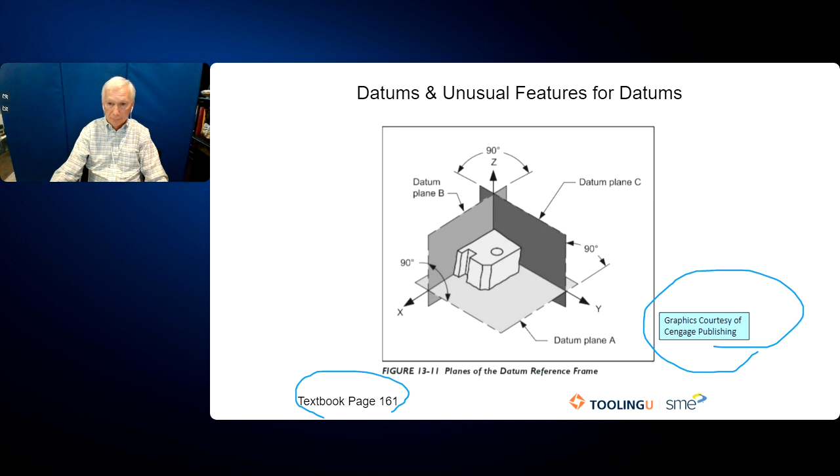This is just a quick reminder of what we should know and where we need to go. We're going to be using datums and unusual features for datums in the following slides. This is here because some of the things that have changed in the ASME standard from 2009 to 2018 involve the definition of how to deal with unstable datum surfaces.

Here are the ways we deal with it. So we have a part that rocks, and we have two choices. We can use an algorithm if we're using a CMM, or we can use shim stock to balance out the rockiness, so that if we're on a granite table using an open setup or standard measuring equipment, which I'll abbreviate SME - that's standard measuring equipment, nothing to do with tooling U-SME.

If we're on a granite table and going to use a dial indicator, we need to use shim stock to keep this thing from rocking. What we do is we balance it - we do not push it all one way or all the other way. We balance it, shim it, and go from there.

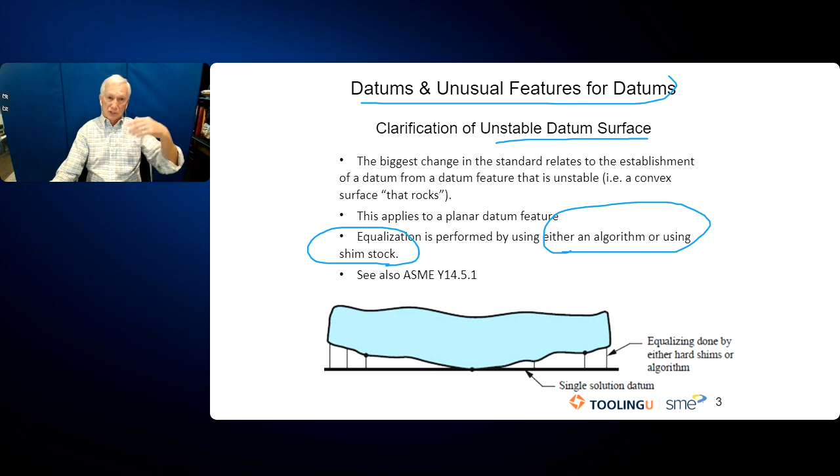Now if it's using a CMM, use the algorithm built into the CMM for parts that are rocking. It will look at your part, and however you balance it, you've got to hold it where it is on the granite table under the CMM, and the CMM will take that rockiness and out-of-flatness into consideration in an algorithm. So just a point of something new and different, because in previous versions we were supposed to rock the part all one way, and now we balance.

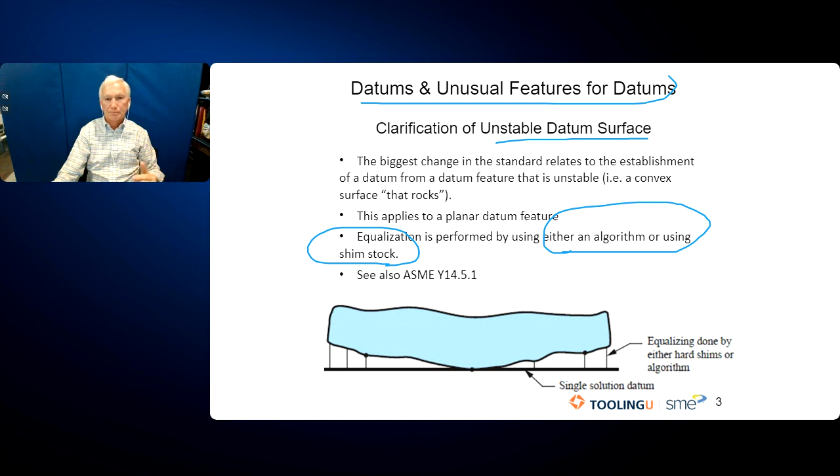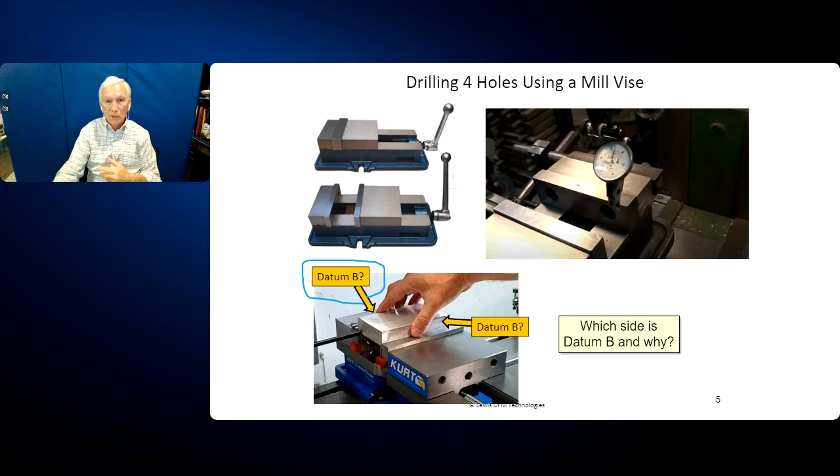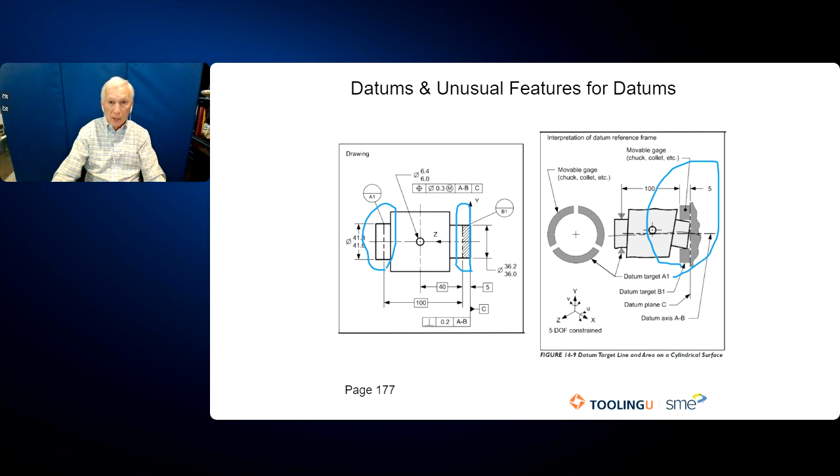That takes you then to the view on the right, and you see that we're going to grab datum A area with a chuck of sorts or a collet, and we're going to make sure that we grab only the area identified with the crosshatch on the left - we will only grab the area that is datum A, which is a circle with something that's a collet. A collet is a tapered kind of thing that grabs a diameter, and it makes line contact.

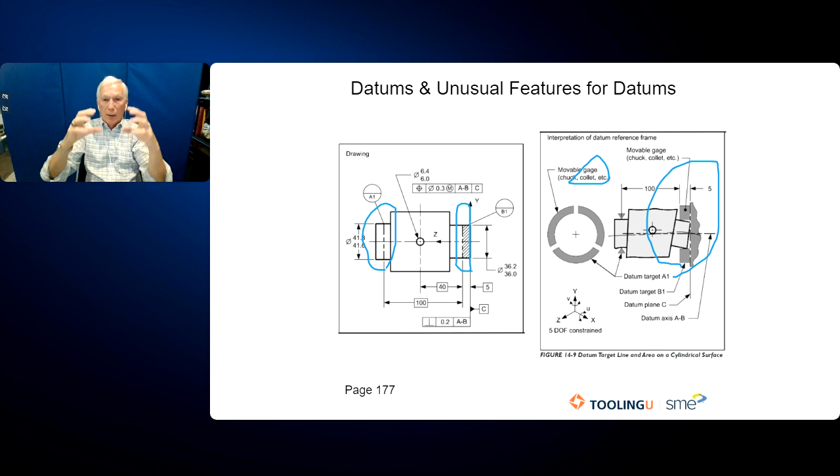It does not make area contact. So on the right, the chuck will make area contact. On the left, the collet will make line contact. And these two are both simultaneously grabbing the part, and that is what creates datum A dash B.

These are some weird things to do and some weird ways to do it, and that's why it's in this lesson. And here's another one.

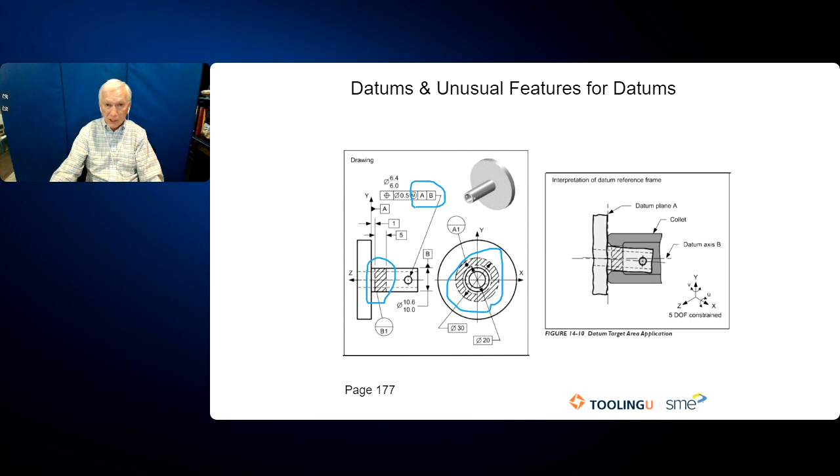We have this part on the left, with datum A on the face of the part and datum B on the OD of that boss that sticks out. According to the feature control frame used on that part, datum A is primary, meaning we make 3-point contact on datum A. Notice that face, datum A, makes 3-point contact on the collet, where the diameter is not making 3-point contact - it's only making like 1-point contact. So understand datum A being primary is 3 points, datum B secondary is 1 or maybe 2 points.

But if we reverse these, we would say B was primary, and then we would grab on all of datum B in the crosshatched area and make 1-point contact on the face of datum A. So understand these datums can be on the same part and they can be conflicting. We could even have holes in this part, some located primary to datum B and secondary to A, and other holes primary to A and secondary to B. It's really the part geometry and the way it functions.

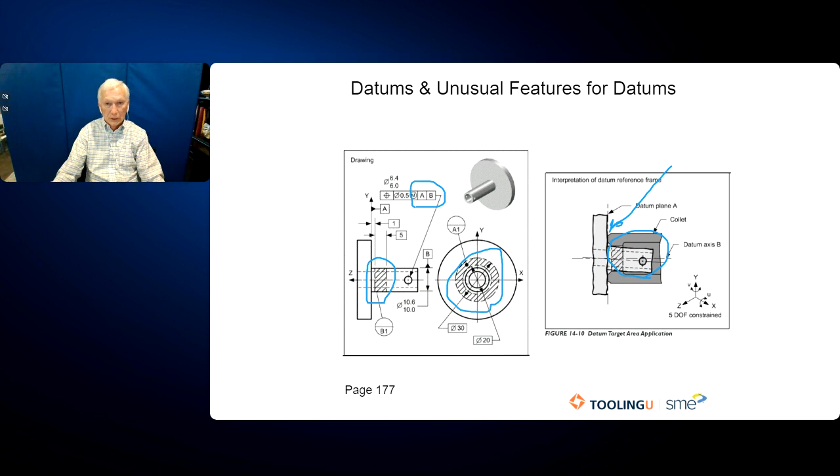Here's some other weird stuff with datums. Notice we have datum A established with 3-point contact. They're on 2 different levels, and that's the weird part. Here they are again - we got 1, 2, and 3. Can we do this? And if we do, how do you call it out?

Well, you see how we got these A's here? You can do these things. Or you can even make datum A off the part a certain basic distance to all 3 points. So this is a weird application. It's on page 177 of the book.

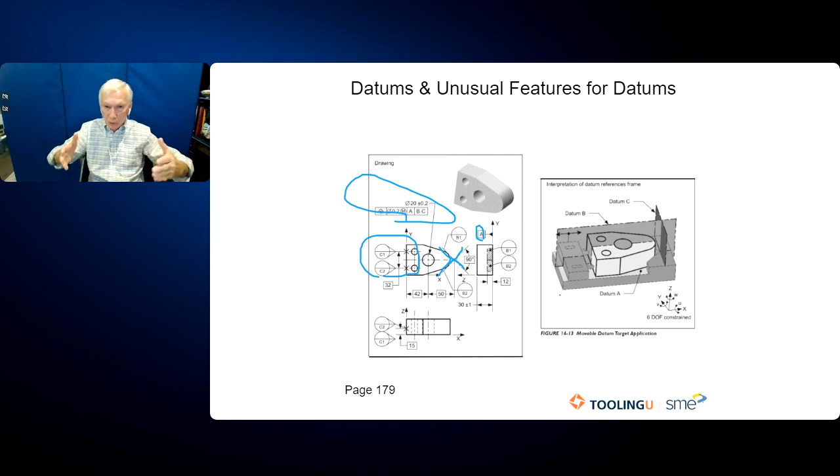It's obtained, if you look on the right in the graphic, after we contact points C1 and C2, we use those points to push the part into the next nested inspection fixture that picks up the contact at B1 and B2. It's probably not going to be line contact - it's probably going to be point contact.

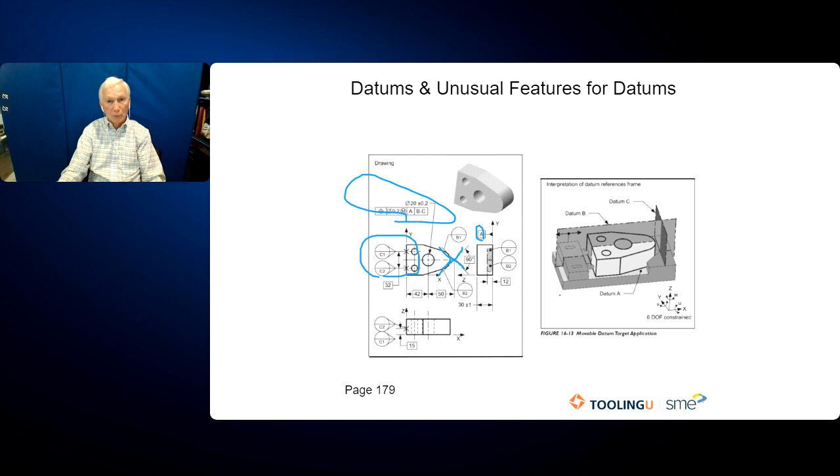So we're moving on. We're done with datums for the most part. Rule 1 is size controls form. But other things we need to talk about are what else does it control? Rule 1: size controls and contains form. I'll show you more what contains means.

Versus what we don't want to do, and that is we don't want to use Rule 1. Rule 1 says by default, anytime you have something of size, you automatically control and contain the form of that size. Versus if I have size but I don't want to control or contain form, then I can use the independency concept. The independency concept - I've got some examples coming up.

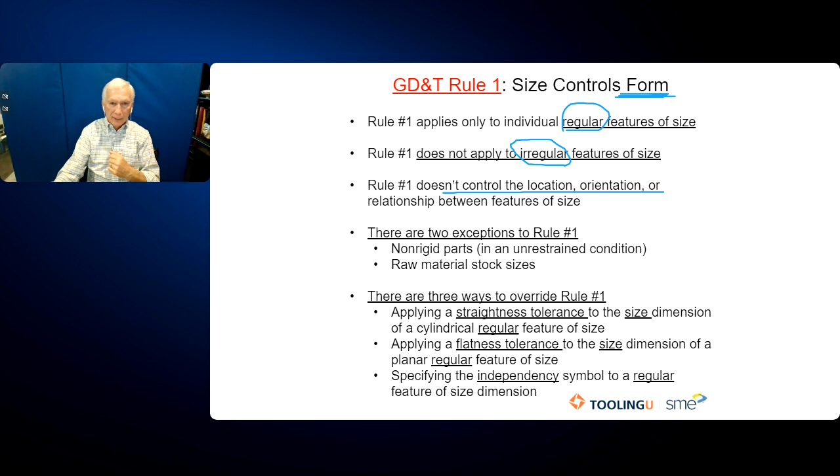Okay, there are two exceptions to Rule 1: if the parts are made out of something like rubber, because they're too flimsy. And if we're buying raw material from a supplier and we want to make sure the material is real straight - well, the straightness of that raw material is controlled not with GD&T, it's controlled by the standards and requirements of the supplier of the raw material.

They will provide material that's straight, round, and whatever it's required to be in their material delivery requirements. We don't use GD&T for that, and because of that, Rule 1 does not apply to bar stock.

There are 3 ways to override Rule 1, and we're not going to go through the first 2 -- that might be something for the advanced, next 10 things. Anytime we use straightness tolerance applied to a regular feature of size, Rule 1 doesn't apply. It also doesn't apply to flatness tolerance applied to a feature of size. If you took the last GD&T webinar, this stuff is in that chart I gave everybody and made sure you all got a chance to see. Go look at it there.

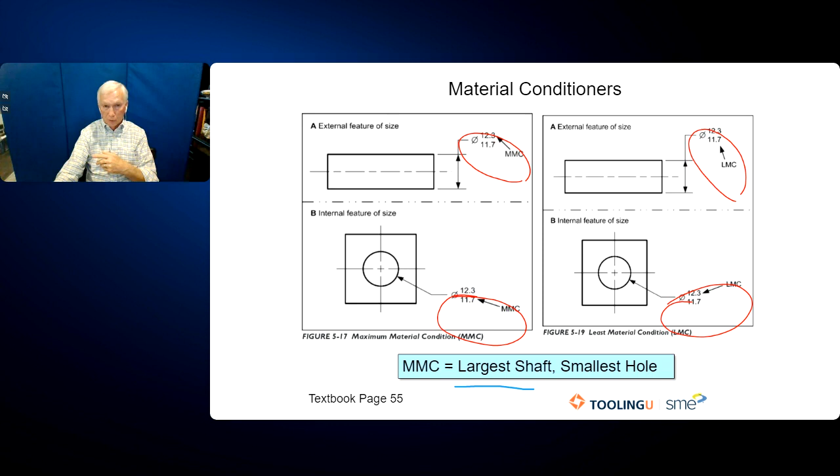In the upper left corner of this figure, we have a round part, and its MMC is the largest shaft. The MMC is 12.3, it is not 11.7. The largest shaft, the smallest hole. So we look at the hole in the lower left, and we see that the MMC is 11.7. So the MMC of the shaft is 12.3, the MMC of the hole is 11.7. We have to remember that, because I'm going to keep talking about it like you do know it.

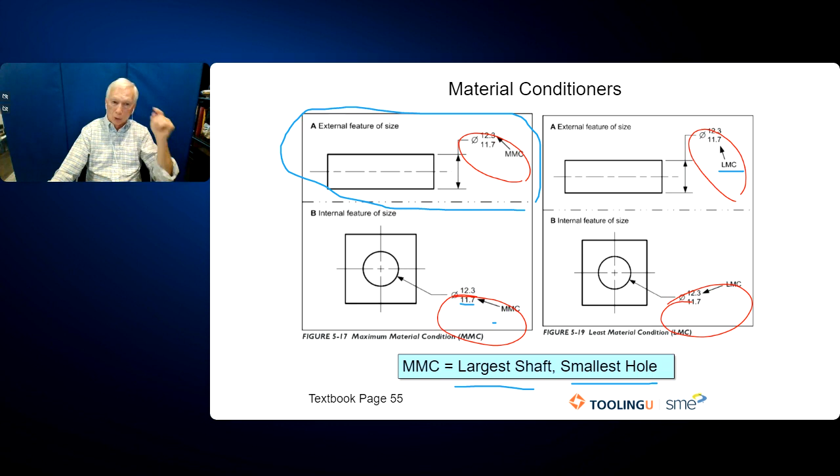Now the figure on the right is LMC, the opposite of maximum material condition. I'm not going to talk much about LMC because it just gets confused with largest shaft, smallest hole. Just remember, MMC: largest shaft, smallest hole. When I'm doing this training in real life, a 3-day training, I repeat that about a dozen times and people still get it wrong. So you will get this wrong if you don't remember -- largest shaft, smallest hole.

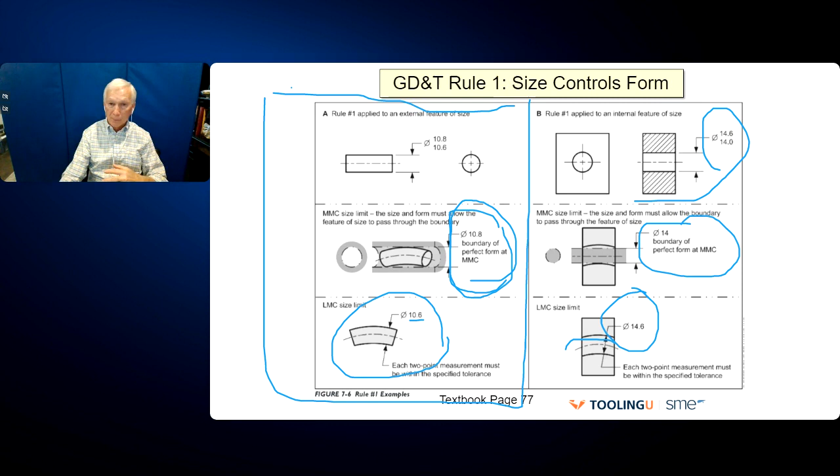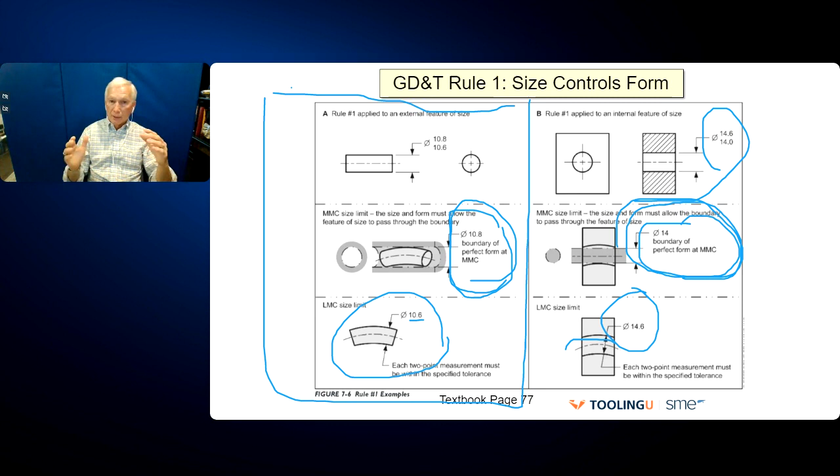So you've got to remember, this is an assumption -- it's Rule 1, you always have to know it, you always have to apply it. And that's why it's so important. So now that you know this, we're going to say what Rule 1 does not control. And I already told you, it doesn't control any of this stuff. It only controls form.

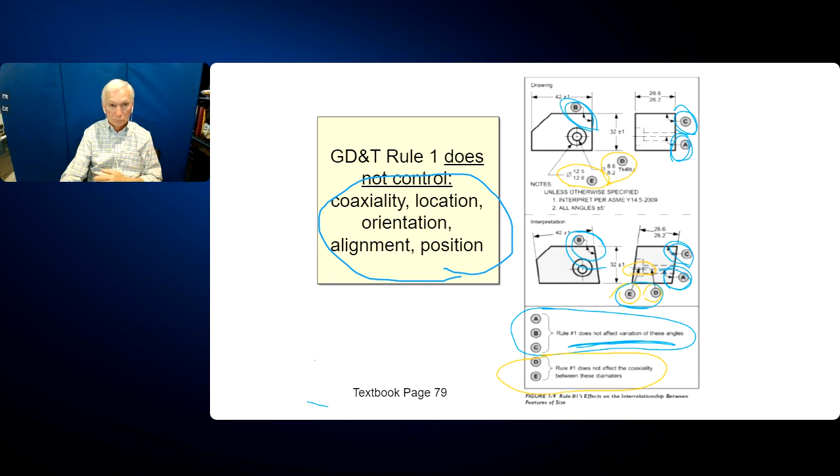But understand, if you use the independency symbol and you say it no longer has to comply with rule one, now it can be out of round any amount or out of straightness any amount, unless you add a straightness or roundness tolerance to that surface and that diameter.

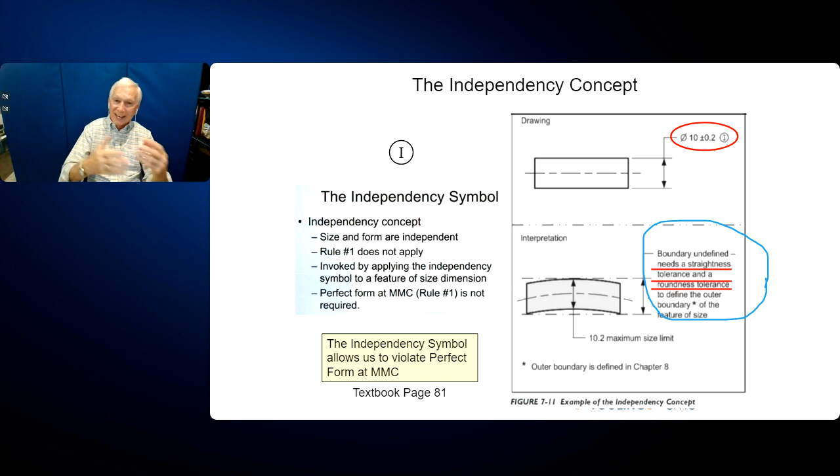And if you do, it should be more than the 0.2 millimeter—probably 0.3, 0.4, 0.5. That would say that the most important thing on that pin is the size, not the straightness nor the roundness. So I'm giving more relaxation to the roundness and straightness by using the independency concept.

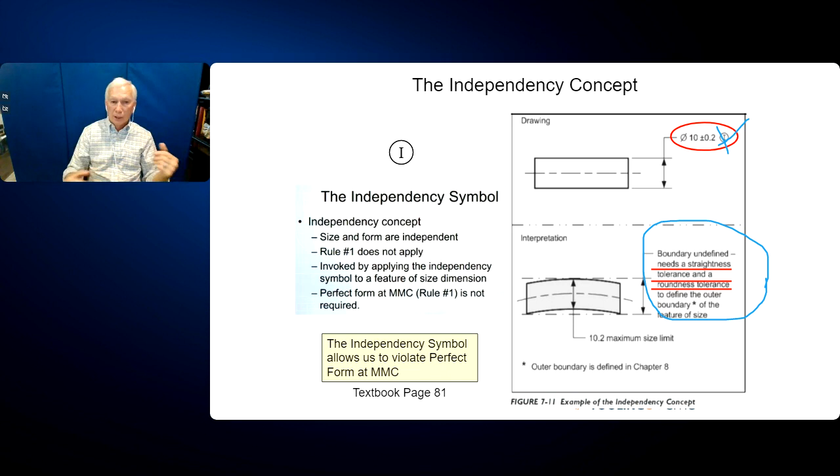But if that roundness and straightness of 0.2 millimeters is good, I would take the eye out. And rule one says now, perfect form at MMC, the 0.2 is controlling straightness and roundness as I deviate away from MMC. So that's why we had to talk about this, so we could understand the independency concept.

Okay, so we're going to keep going. Regular and irregular features of size. They look like this. These are regular features of size.

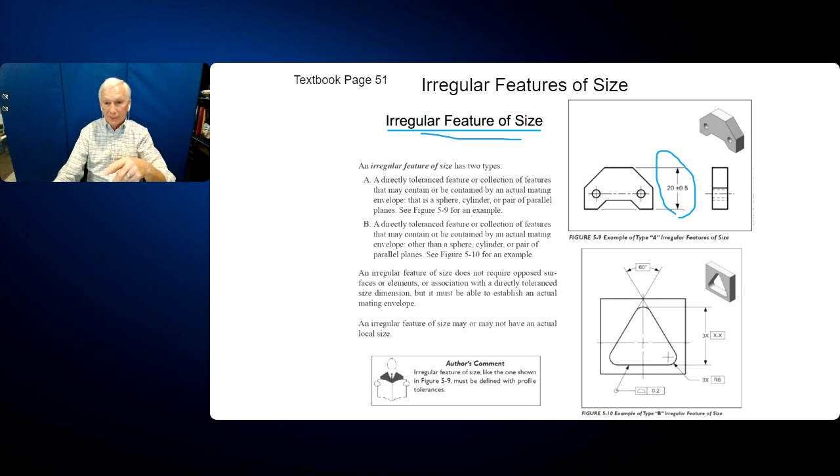Regular features of size are opposed or partially opposed—that means everything on here is opposed, and you can measure it with a micrometer, that kind of stuff. This, you cannot. You've got the 20 millimeter dimension, and there's no way to use a pair of micrometers to measure that. So this is an irregular feature of size, and an irregular feature of size does not require us to abide by Rule 1. So Rule 1 doesn't apply to irregular features of size, but it does apply to regular features of size.

Now you know. Okay, we already talked about that.

Pitch diameter rule. What we show here is a drawing on the bottom—it's a partial drawing with some threads. The reason for this is to tell you that if you call out threads and you don't use major or minor diameter, the default is that you'll automatically be required to measure the location of those threads to the pitch cylinder, or pitch diameter.

And it's not just for threads—it's for gears, splines, anything with a pitch cylinder or pitch diameter, including threads. So this is called the pitch diameter rule.

Now, why is this important? Because 99% of the people out there putting threads on drawings don't know they have the option to add major or minor diameter to the call out. I do, and I put it on my call out.

Notice in the red box, it says major diameter. Now, because I'm making this part all in one setup on the lathe, I'm cutting the major diameter and all of the other diameters, including the datum diameter, which is B—you can't see it because it's kind of off the page. I'm cutting them all in the same setup.

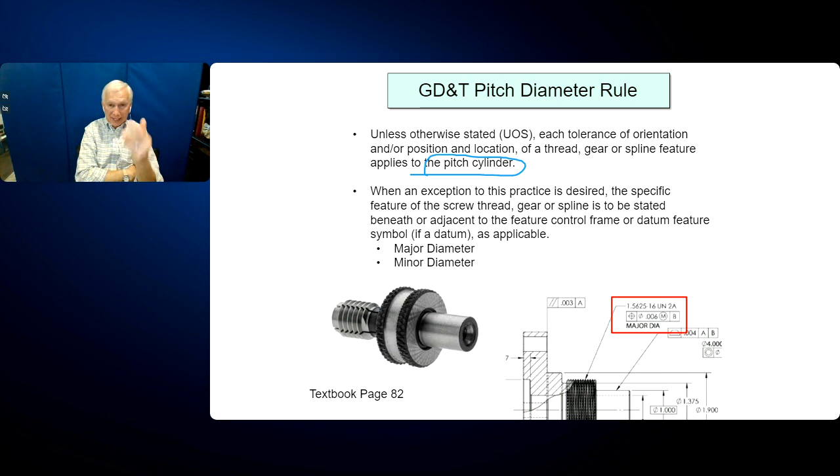And when you do, that's how you would call it out. And if you have a threaded hole you're applying threads to, and you don't call out minor diameter—if you leave it at pitch diameter, which means you put nothing on the drawing for major or minor diameter—the default is you get pitch.

Then you have to use something like the tool on the left, which threads down inside the threaded hole. It's a self-centering, spring-loaded gauge that you can thread into the hole, which picks up the pitch diameter, and you can sweep the OD sticking up on the right end of that pin to figure out where the center line of the pitch cylinder is on the hole.

And these are very, very expensive. So the recommendation is: don't use pitch diameter on either OD or ID threads if you can accomplish the same thing with minor diameter on ID threads and major diameter on OD threads.

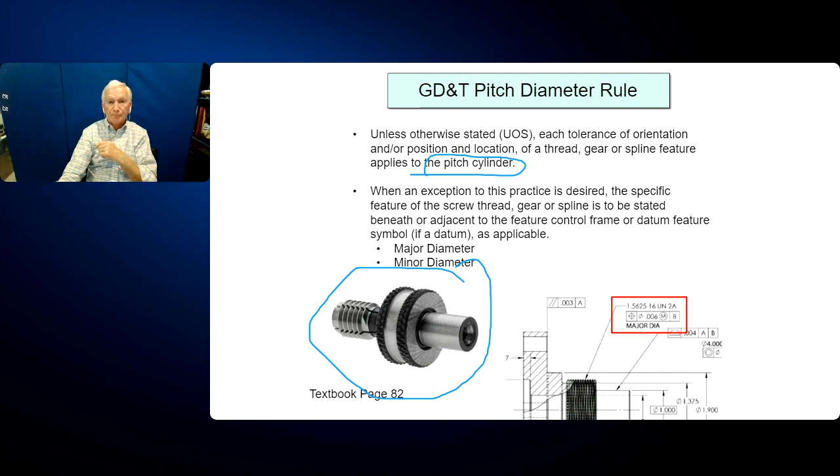Go and no-go and functional gauges. We're doing pretty good. I'm not sure what page we're on, but we're doing pretty good.

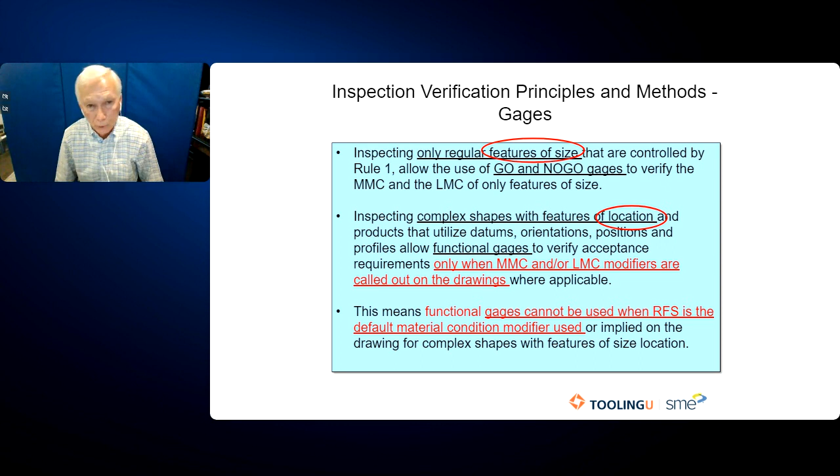Okay, so first of all, gauges fall into two categories: size gauges and location gauges. When you have a production part that you're producing and checking, the thing we check first of all is always size. If we have a pattern of holes, we always check the size of the holes, and we can do that with go and no-go gauges, thread gauges, or plug gauges. In that case, we're using go and no-go gauges to check for size, but not location.

Now, if we want to check the location of the 4 holes in our block that we showed a little bit ago, we would use go no-go gauges to check the sizes of the holes, and then we would have a functional gauge, identified here in the second bulleted point. A functional gauge checks the location of the holes as well as a little bit of the size. So when we want to check size, we think go and no-go. But if we want to check location, we have to think functional gauge.

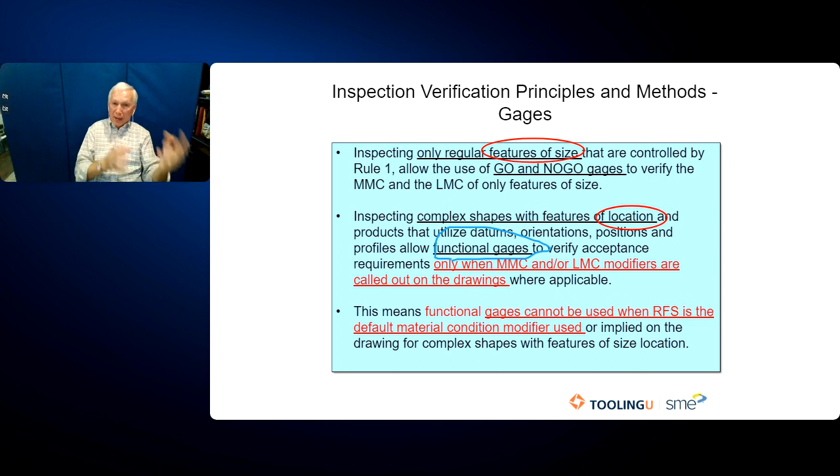Gauges are wonderful things, but gauges fall into the category broadly of attribute data. Attribute data says, I don't know what the size is, but the go didn't go, or the no-go did go, and it failed. Or the functional gauge didn't go on, and I don't know what's going on, but it didn't go on. I'm rejecting it because the size gauges didn't work, the functional gauges didn't work. That's because these things are categorized as attribute data. They don't tell you any sizes, they just tell you if it's good or bad. They have their applications in high volume production.

But in low volume production, we may want to use actual micrometers or depth gauges or CMMs. CMMs are actually collecting data that we plug into the CMM. We tell the CMM what the diameter should be, and then we go put the probe down in the hole, collect points, and the CMM figures out the size, and compares the points it gathered to what the size is that you entered into the CMM, and it says, oh, it's a good part, or it's a bad hole.

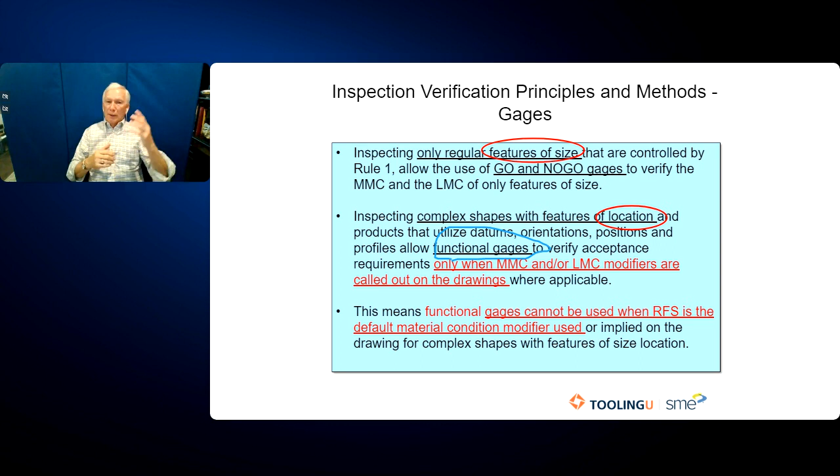And so we have attribute data with go, no-go gauges and functional gauges, and we have variable data with a micrometer and a CMM. We have to understand the differences between the kinds of gauges and the things these gauges will check.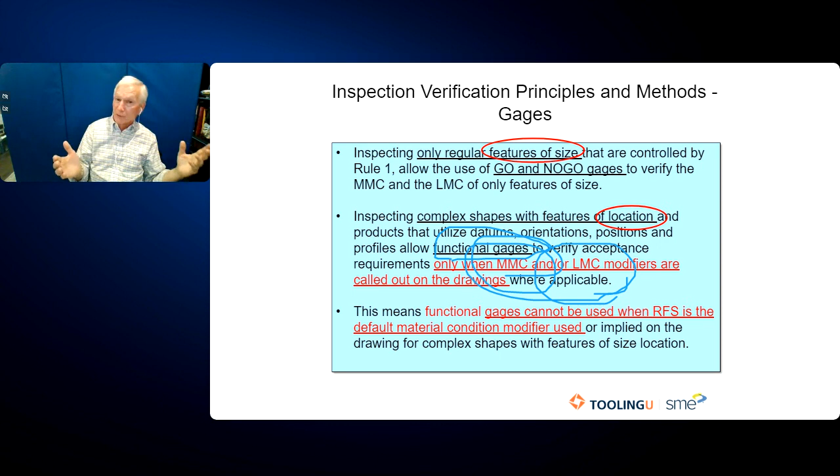Now, functional gauges are only used when we are calling out MMC or LMC on the drawings. If you have a drawing and you don't want to use MMC or LMC, and you don't put any material condition modifier on the feature control frame, it's automatically, by Rule 2, regardless of feature size, which means it doesn't matter if it's at MMC or LMC, whatever the size is, regardless of its size, it has to meet this true position.

You don't get bonus tolerance with RFS, which is regardless of feature size. And the biggest issue is you don't get to use functional gauging if it says RFS. Now, the sad part is it doesn't even really say RFS - it only has to say not MMC, or M in a circle, or L in a circle. Because if you screwed up and forgot the M in the circle, but you wanted it to be MMC, too bad, you got RFS.

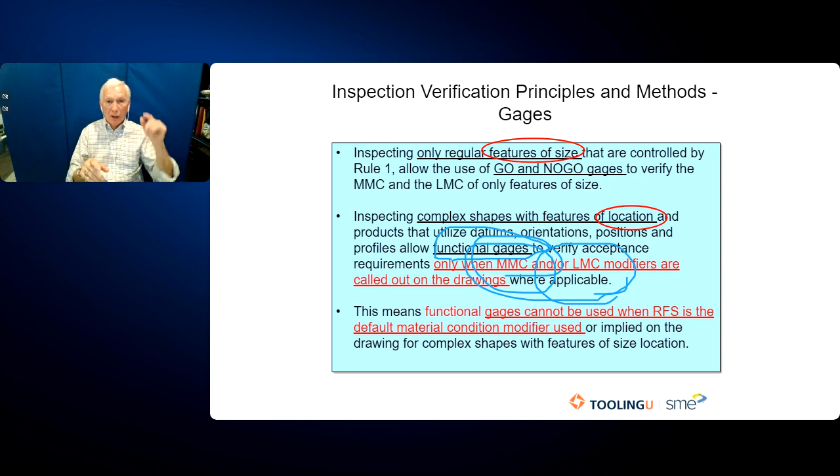And if you put RFS on the drawing, or if it's even assumed, you're not allowed to use functional gauges. So if your production is going to be based on using functional gauges, you better make sure all of your feature control frames that have material condition modifiers and features of size all have MMC. It's a big, big deal. I can't tell you how big of a deal it is.

Okay, these are what go gauges look like. You've probably already seen them. If you want more information about gauging, there's another separate ASME standard. I have it, it's very well done. It's kind of expensive, but they all are. And then this is an example of a part with a go and a no-go gauge.

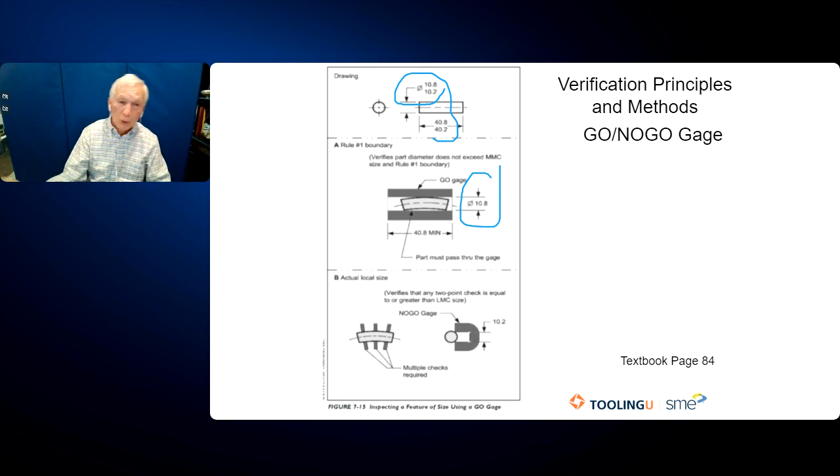If this is our part and the diameter is 10.8 to 10.2, we make a gauge that is the largest shaft. Remember, at its MMC, the MMC is 10.8. Here's 10.8, there's my boundary of perfect form at MMC. That's my gauge diameter, 10.8. That means a pin at 10.2 will go through there, even if it's bent up to 6/10 of a millimeter.

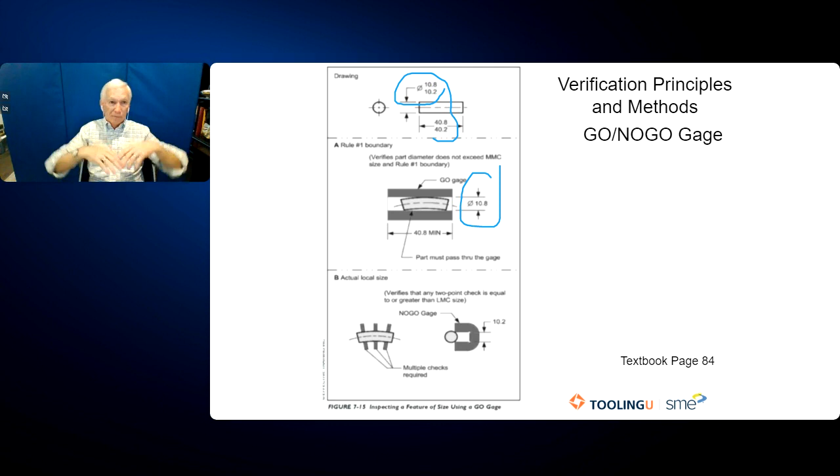If it's bent more than 6/10, it won't go through that. That means it'll fail the go gauge, and that's what we want. If it's out of round more than 6/10 of a millimeter, it won't go through that go gauge, because the go gauge is perfect form at MMC.

Now we checked the diameter of the material at its high side. Now we check the material at its low side, 10.2. Now, would a 10.1 diameter gauge go through that go gauge? And the answer is yes, it would.

So in order to properly use go and no-go gauging, you've got to use both the go and the no-go gauge on the same part, one right after the other. Because if the part diameter is really 10.1, it will go through the go gauge, but it won't go through the no-go gauge. The no-go means if the diameter of the pin is 10.1, it won't go into the 10.2 wide gauge, and that means it'll fail. I'm sorry, if it's too small, it will go into the no-go gauge, and that means the diameter is too small and it's below 10.2. So this is the way go and no-go gauges work.

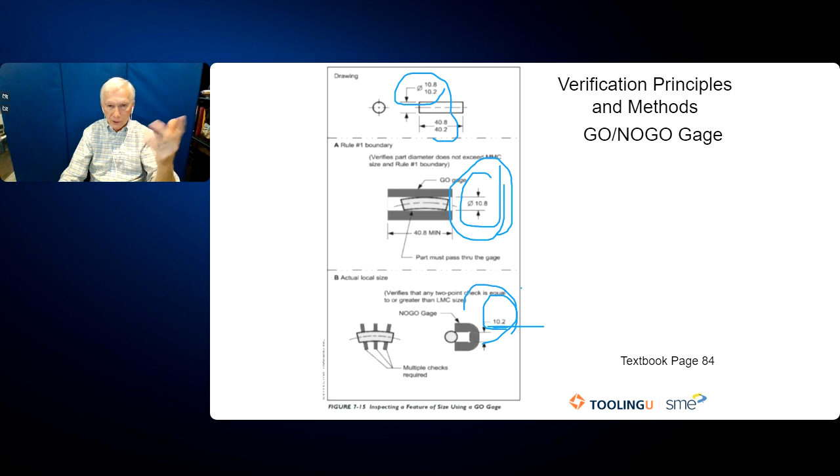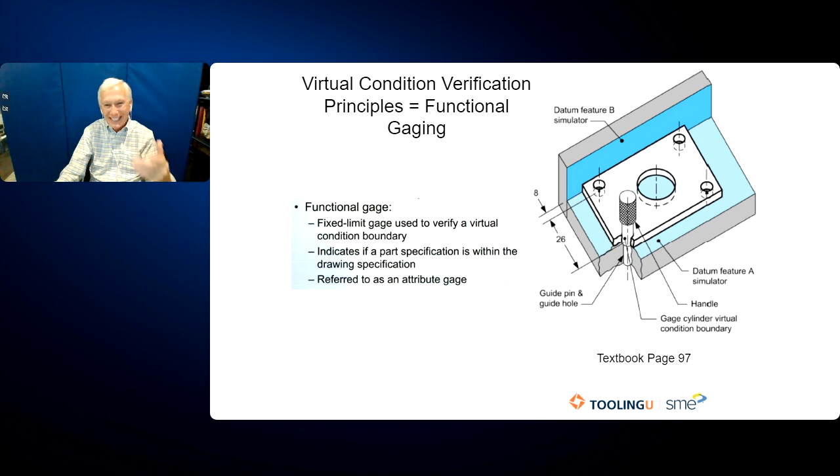And here's some more drawings of them, we're going to skip those. This is an example of a functional gauge. A functional gauge is used on a part that's got multiple holes. This is a part that goes into a fixture of sorts, and the pin replicates the hole - not just the hole, but the hole at its worst case, or virtual condition.

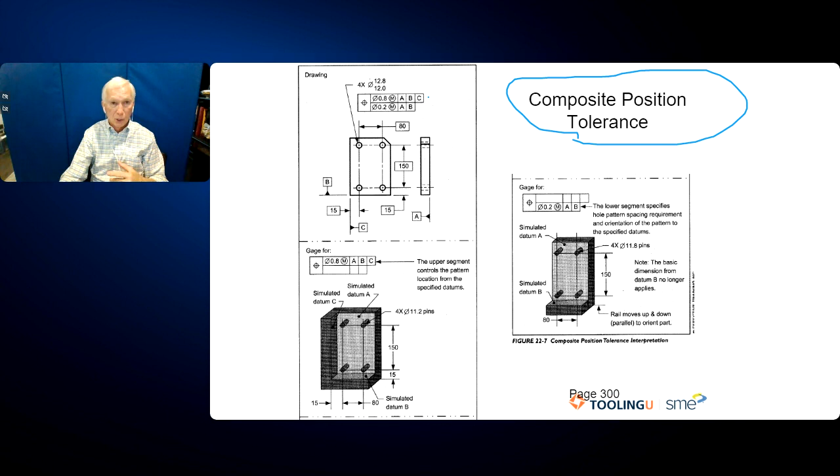So we need to understand a little bit more about that, and here's what it looks like. So what we have is two things going on here - this is a pretty busy slide. First of all, this is composite position tolerance, and composite position tolerance has dual position tolerance requirements. It's read as position within a diameter of 0.8 millimeters at MMC to datums A, B, and C. And at the same time, a diameter of 0.2 millimeters at MMC to datums A and B, but not C.

So really what we're saying here is the most important feature on this part is the pattern of holes. The pattern of holes from hole to hole is really, really important - it's got to be within a diameter of 0.2 millimeters at MMC to datums A and B. That's the most important thing on this part. Now, to make it easier to manufacture, we're going to allow that pattern of holes to float to datums A, B, and C now to a much greater degree, to make the cost of producing those holes to the edges, the datums A, B, and C, more economical.

And so this is why we use composite position tolerance. That's what it is, how it looks, and why we use it.

When we have it on a drawing, because the position tolerances are at MMC, I can use functional gauges. But before I use functional gauges, I have to measure the diameter of all these holes. The reason is because I always have to measure size and location. My functional gauge only gives me location, it never gives me size. So we have to measure size, and we can do it with a go, no-go gauge, or an inside diameter micrometer or caliper, or something to check that size.

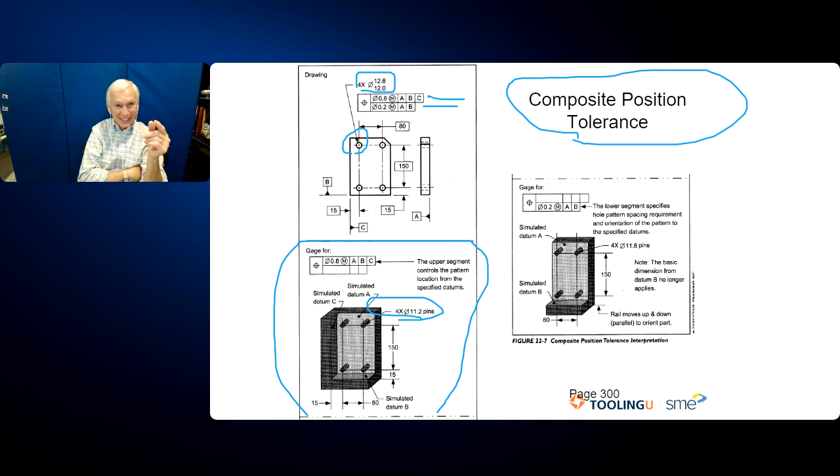And so you see this pin, these four pins are a pin size of 11.2, even though the smallest hole is 12.0. We have to use the gauge to figure out the smallest hole or the biggest hole and its worst case allowable position error, which in this case is 8/10. I took it right from the feature control frame, right up here.

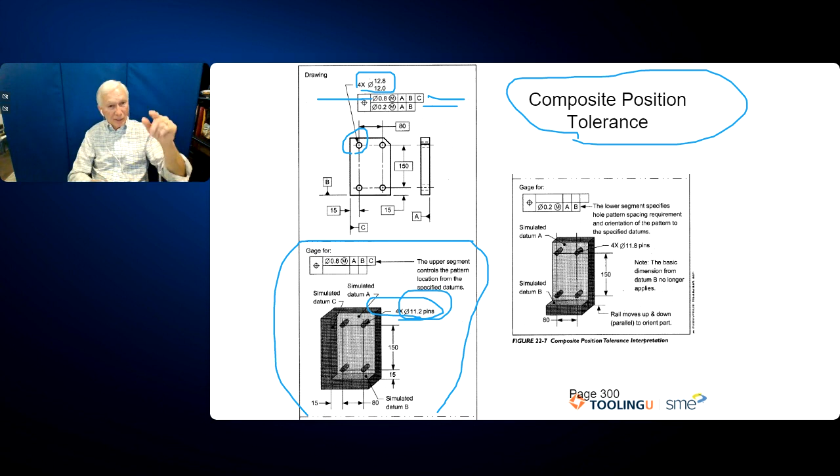Okay, so you take the MMC of the hole, 12.0, the smallest hole, minus the 0.8, that gives me a pin size of 11.2, and that's the size that the pins have to be to check the position within a diameter of 0.8 at MMC.

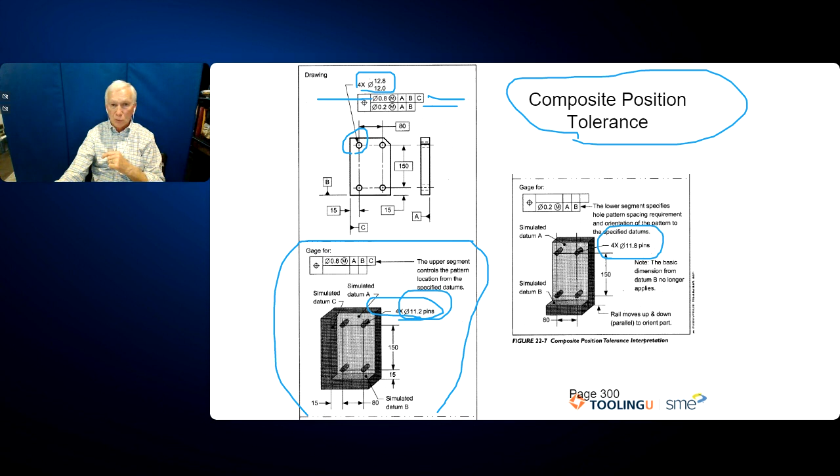But in order to check the other position tolerance of 0.2 millimeters to datums A and B, we have a different pin size that is taken from the lower feature control frame. I'm telling you where the math comes from: it's the MMC of the hole, which was 12.0, minus the 0.2, which is 11.8. That's the diameter of all four of those pins. So this is a functional gauge, what it looks like, how it's used, how we determine the pin sizes, and how it's applied to a part with composite position tolerance.

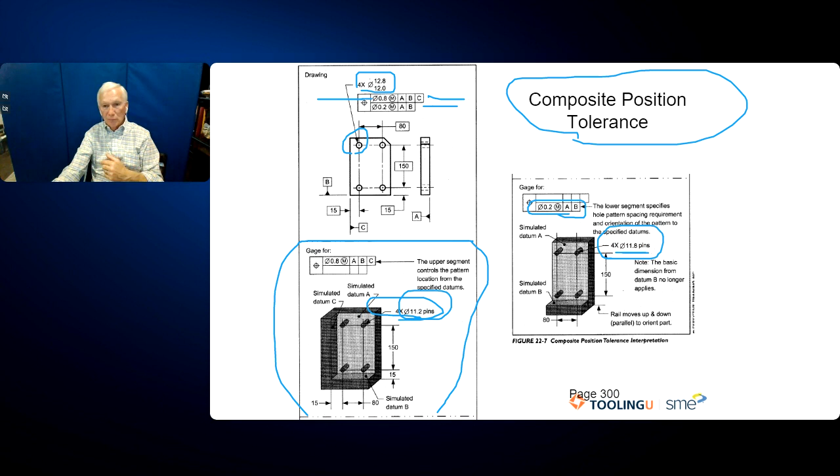But if we use the same part and put it on a CMM and digitize points all the way around the part, we get all of these points. When we hit enter into our CMM, the CMM uses a process called the sum of the squares, and it figures out what the roundness and circularity is of all the points you gave it, and it will give you an accept or a reject, a good or a bad.

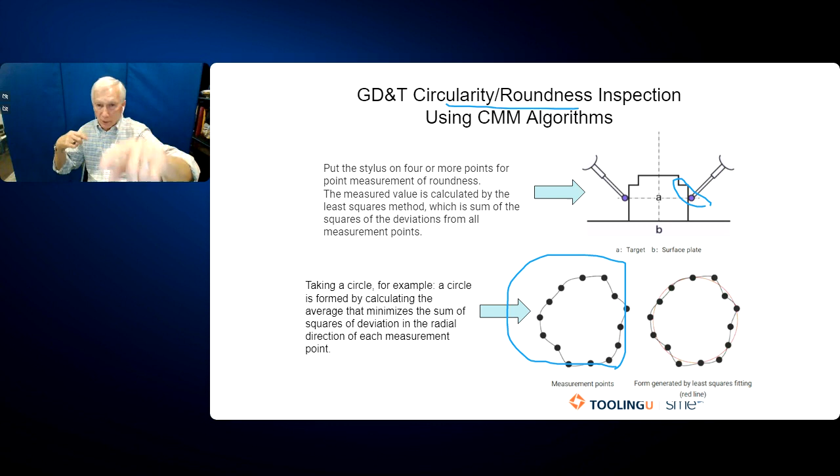These two measuring processes give you different results. If you check something using the CMM on the right, and the CMM said it was acceptable, but you took it and put it under a dial indicator and rotated the part, you would be measuring the travel of the dial indicator. You may get some points that say they were out of tolerance that the CMM said were okay using the sum of the squares algorithm. The CMM said it was okay, but the dial indicator is going to say it's not okay.

So you need to be aware that you could get two different things measuring the same part two different ways. So beware.

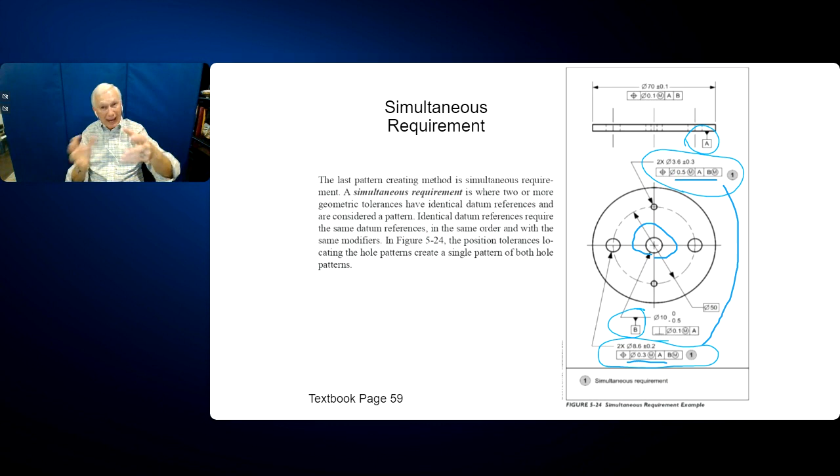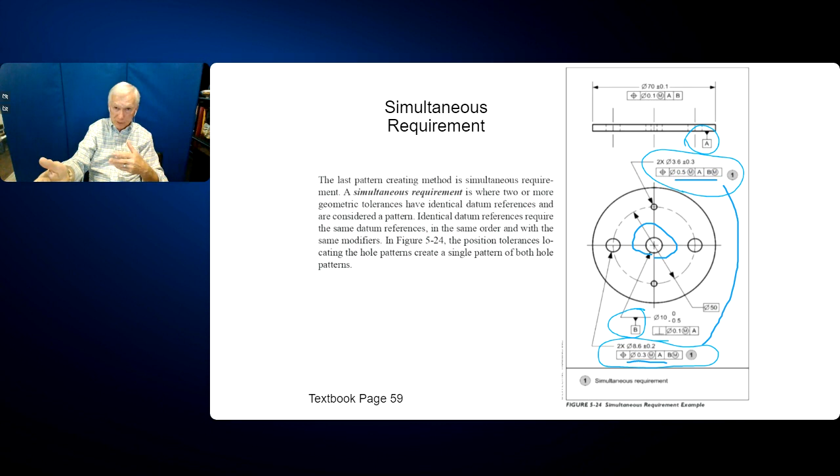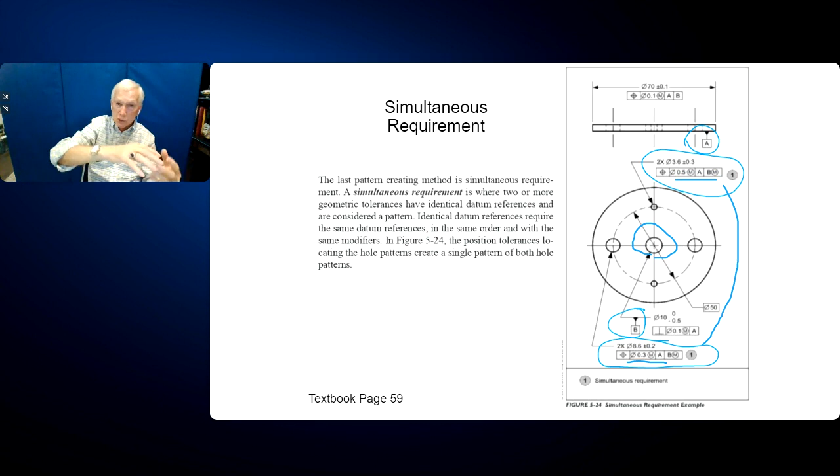Why is that important? Because when we're building an assembly with 4 or 5 different parts that have different patterns of holes, if those patterns are not located to the same datums in the same order of precedence, then when we do a tolerance stack up, we have to build in additional clearance, float, and slop. Whereas because I've located them as a simultaneous pattern, I don't have to add in additional float and slop and clearance when I build my assembly up. This is very valuable when doing a tolerance analysis or tolerance stack up.

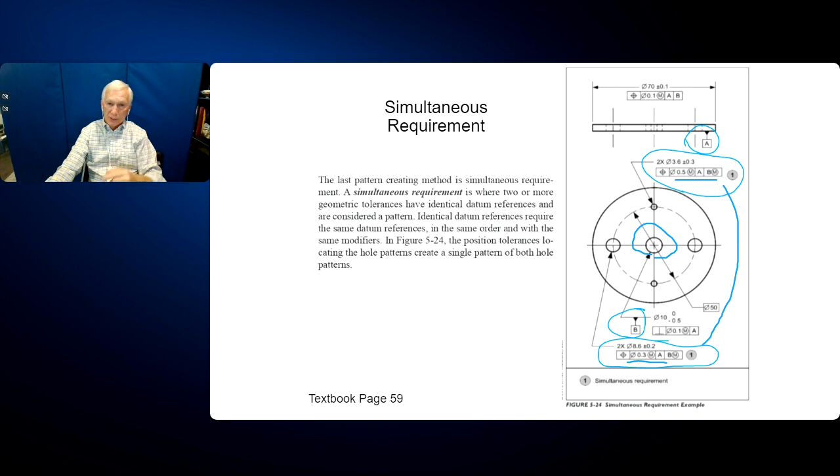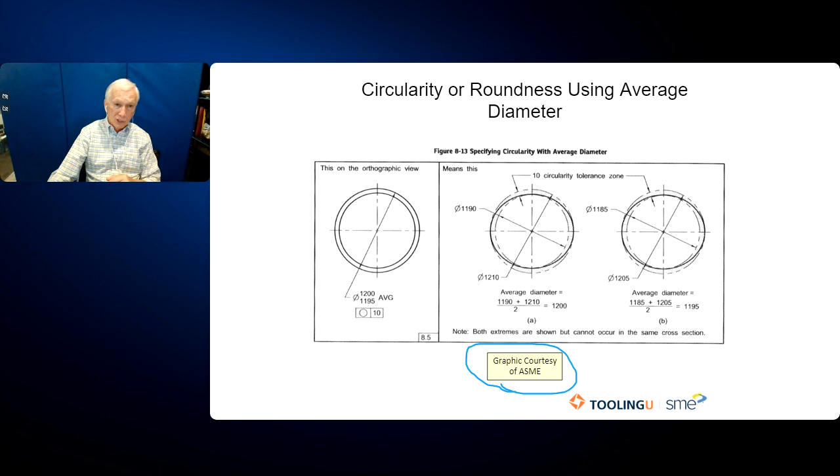When you have a part with a real thin wall, like this part here, it tends to go out of round. It's not well supported, and gravity makes it go out of round, so in a free state it's never perfectly round, but it'll still work. We can apply a call out like this that says average diameter within or between 1195 to 1200 with a roundness of 10 millimeters.

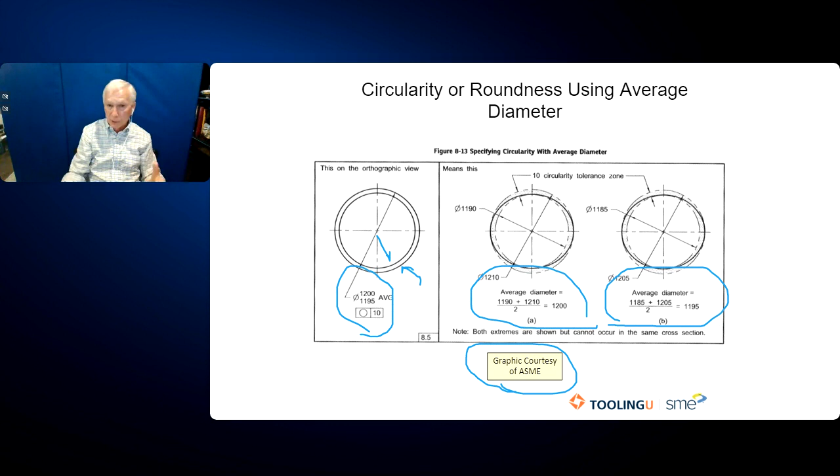That means you have to take multiple measurements on the part at different clock positions and do your calculations to calculate the average diameter of the 2 offsetting 90-degree measurements. As long as those are within the drawing call out, the average diameter, other extreme dimensions are allowed to be out. So it's a good tool, a nice thing to know is out there, another tool in your tool belt.

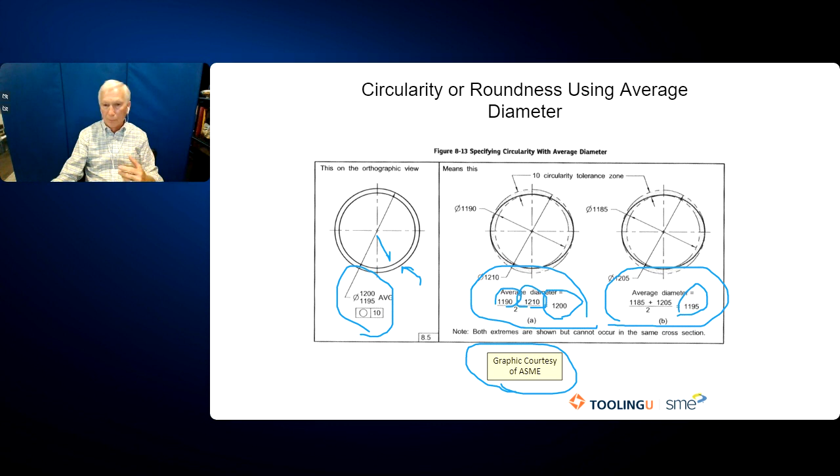Dynamic profile. We have normal profile, which means profile has to be normal to the surface, which is perpendicular to the curve. Dynamic profile is a different thing.

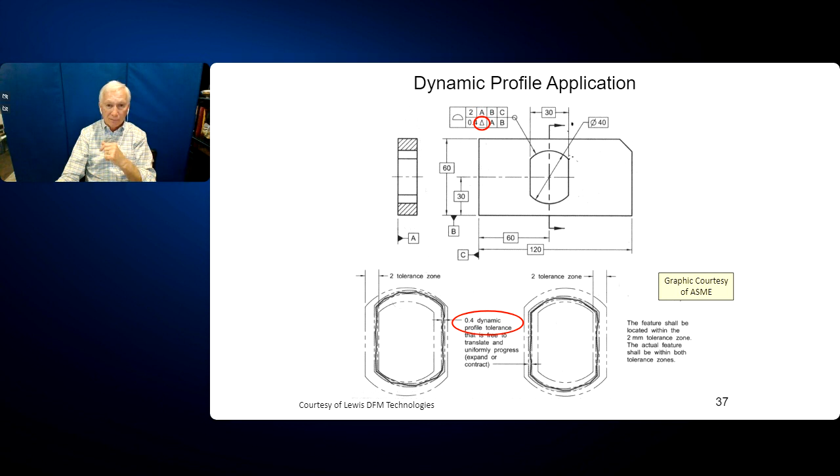Without that dynamic call out, this 4/10 of a millimeter has to be within the 4/10. With the dynamic, it can float anywhere in there. That's right out of the ASME standard.

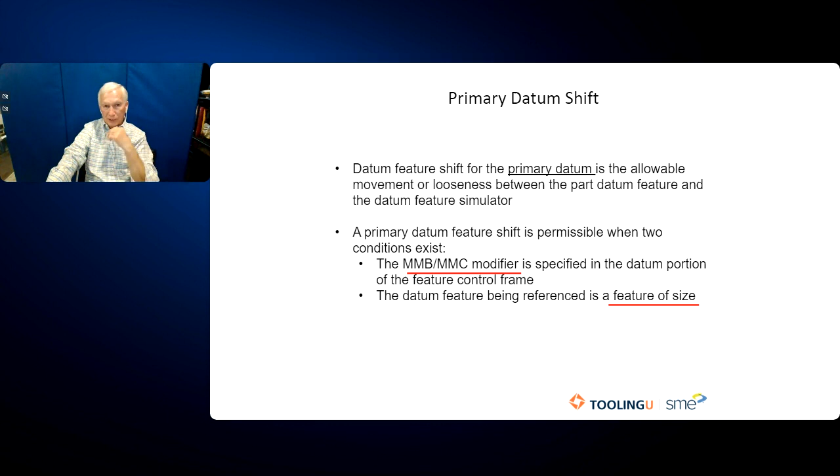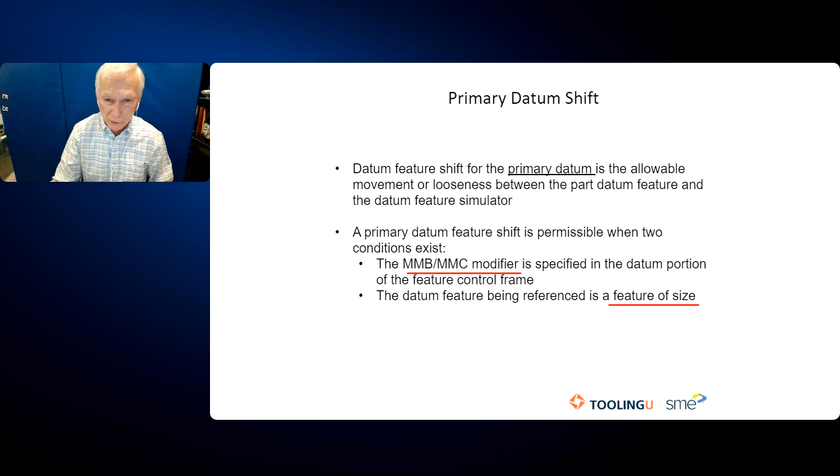Primary datum shift. I got a couple of really difficult things here. Primary datum shift is we have a material condition modifier, very, very important, and it's a feature of size. I'm going to show you what it looks like.

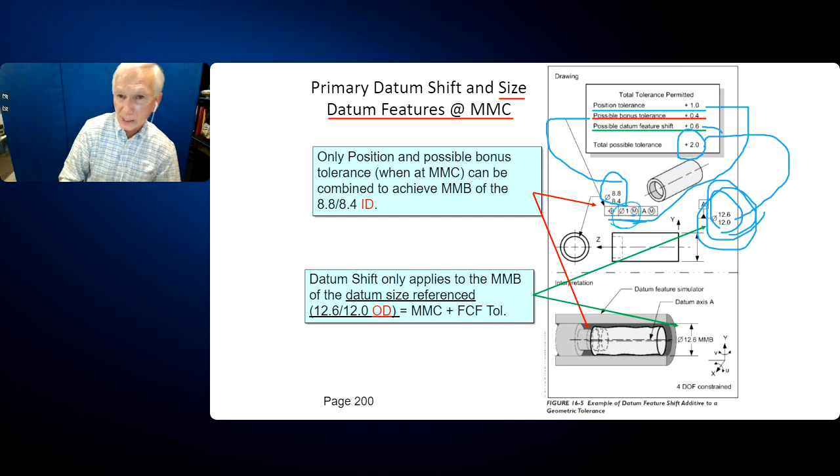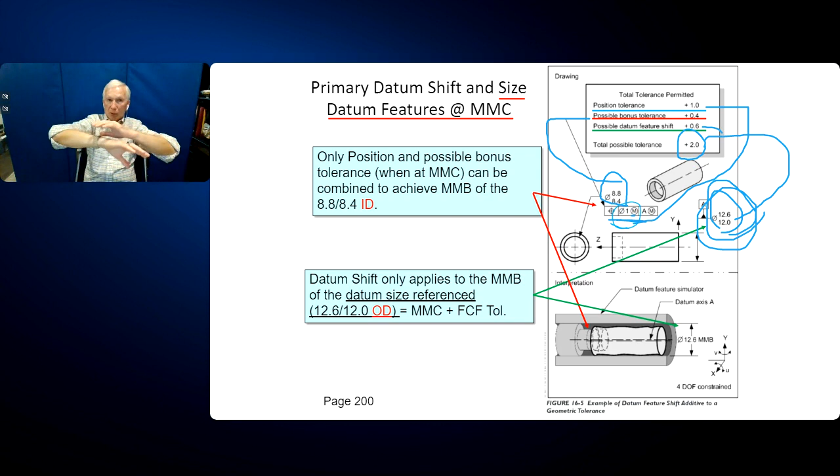Not at MMC, only at LMC. The farther away I go from MMC, the more possible shift I get, okay? So I only get 2 millimeters of possible float at LMC. That's why you got to know your MMC, LMC terms.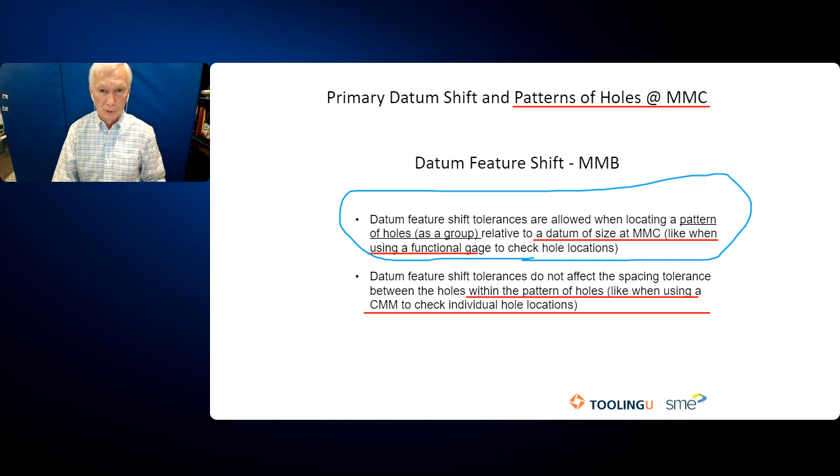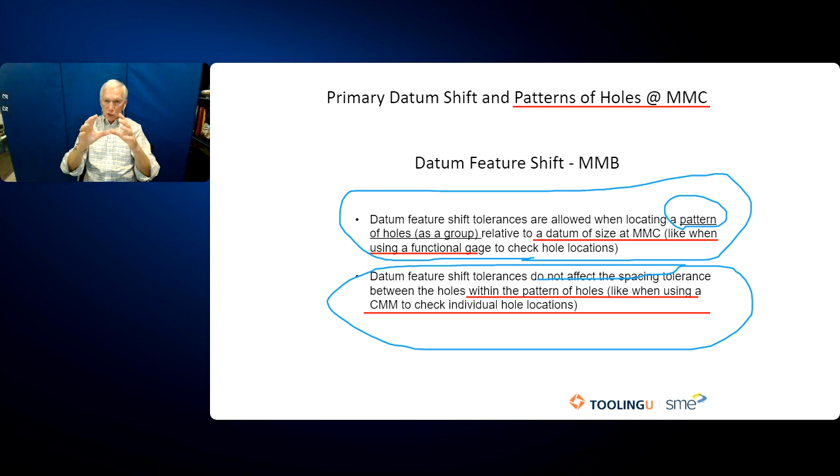Datum shift is allowed to only the pattern of holes, okay? We have 2 things here. Datum shift only applies to the pattern of the holes versus the actual holes themselves. There's a big difference here. We're allowed to let the pattern of holes shift, but not any of the individual holes within the pattern. And that's the part that you really got to think about.

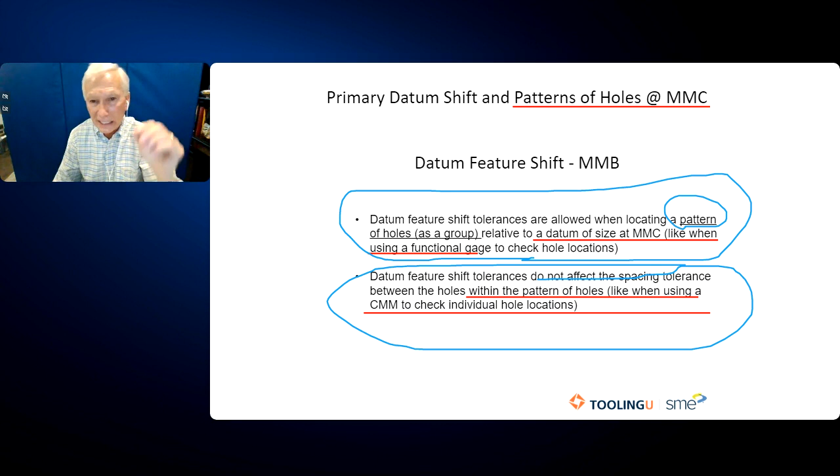You got to really look at the key words here and look at what is in this graphic, which is pretty simple and straightforward, but is really, this is the same graphic. It explains a couple of things. Datum feature shift is permitted only to the location of the pattern of holes, not to the individual hole position location.

Now, does the Krulikowski book have all the arrows and the colored boxes? No, they don't. Those are from me. It's my attempt to help you figure this out.

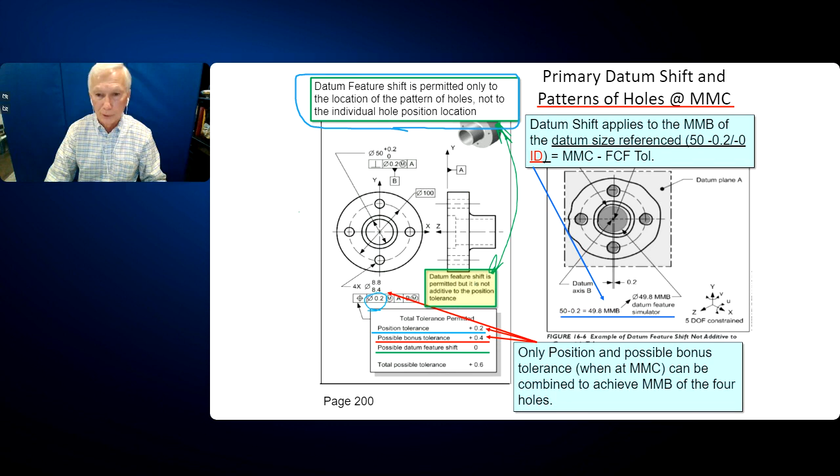Keep in mind, the takeaway is the upper left corner. Datum feature shift is permitted only to the pattern as a pattern, not to the individual hole locations. And if you think about it, the pattern of holes is only checked with a functional gauge, whereas the hole positions are checked with a CMM. So that might help you. It helped me. And this is the same thing.

The takeaway here is the axes of both hole patterns must be within the same cylindrical tolerance zone. The axis of both patterns of holes have to be within the big tolerance zone. And that's shown additionally in the next chart.

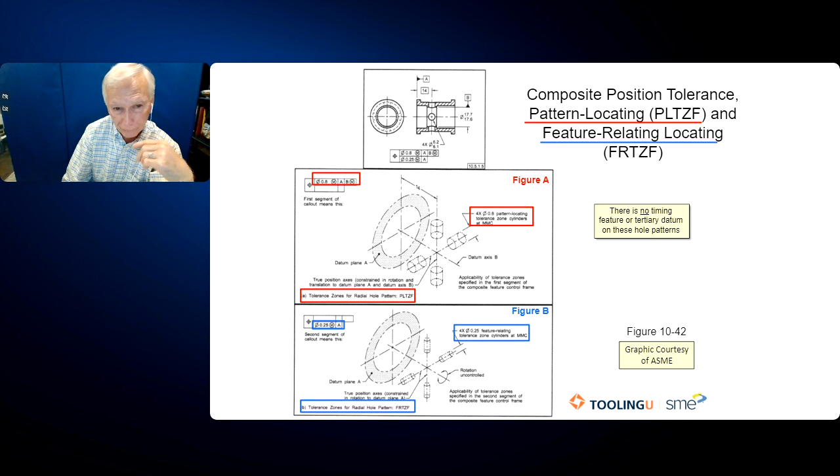Same graphic, same exact graphic, only now we're showing them, let's see, maybe I did it. Yeah. Okay, so this is part 1, and this is what it would look like. This is part 2, where the holes are on the periphery, and we have composite position tolerance. We have PLTZFs and FRTZFs, and this is the pattern for the top geometric control.

This is the pattern for the lower geometric control, and the next slide overlays them and says, I'm going to read the box. When the secondary datum is not contained in the lower FCF, actual feature axis of each hole pattern shall be simultaneously within both tolerance cylinders.

So this should be enough to show you what it would look like. And I'm sure you're going to want to look for what the graphic really looks like, so you can dig deeper into it. I know I certainly have.

Rose, Angela, I think I'm done. I think we went over a couple minutes, maybe just one minute. And if there's any questions, I'm willing to answer them if you guys want to summarize them.

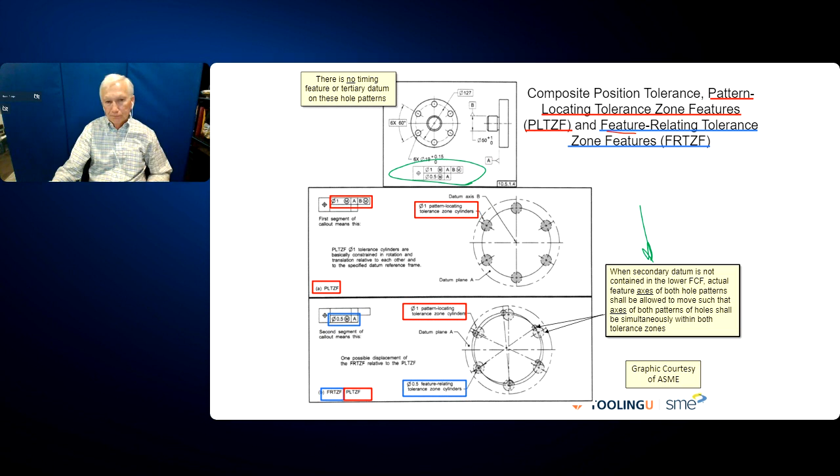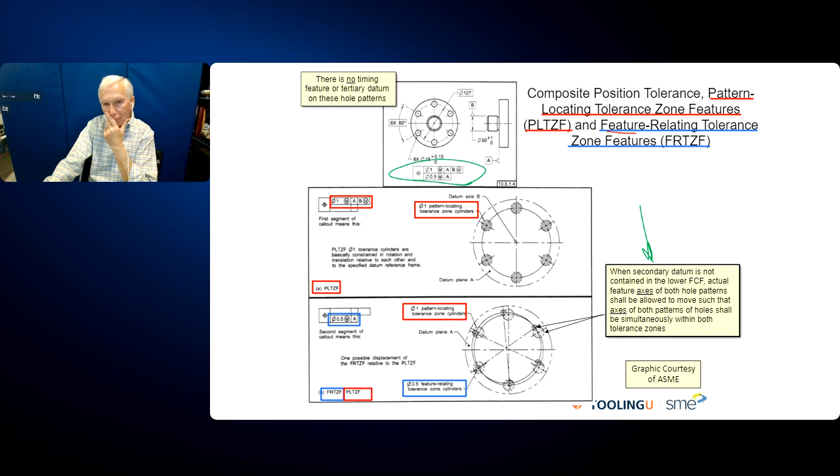And there was one question, Mike, would you scan or take hits using a CMM for roundness or circularity? I'm going to go to that slide.

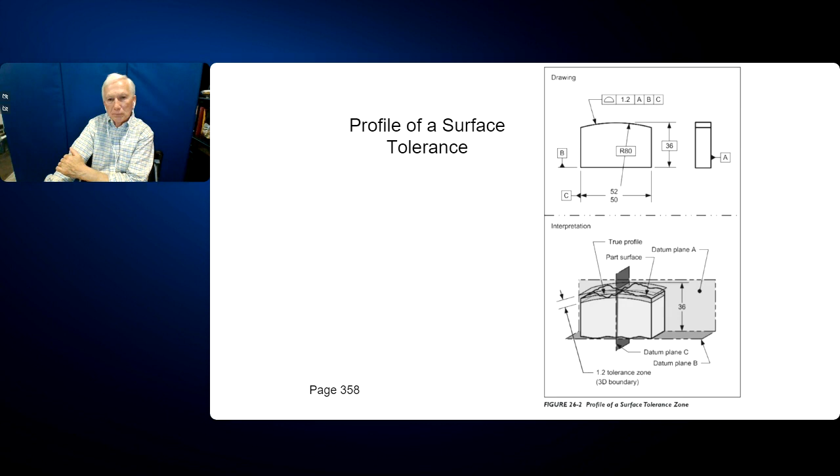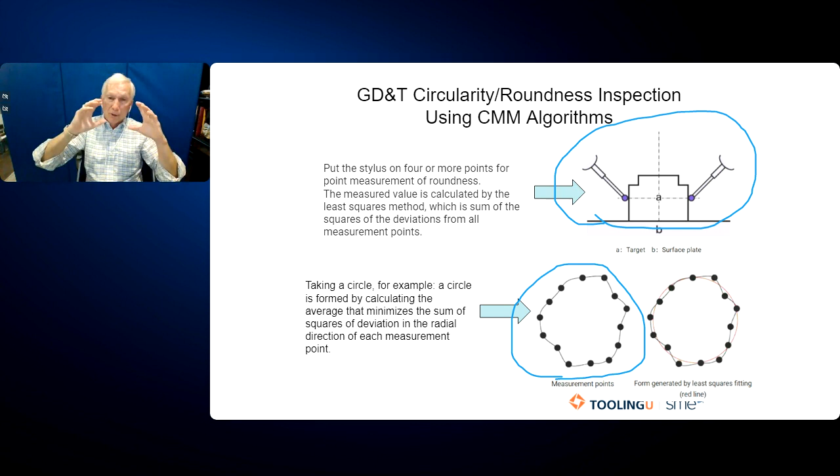But if you're using a coordinate measuring machine, like in the top, to digitize points around the same part, the CMM is going to collect that point, plot that point, and then do a calculation, an algorithm using the sum of the squares of the locations of those points, and it's going to make a circle. It's going to tell you, even if some of the points are outside of that circle, if the calculated circle using the sum of the squares is within the tolerance of the feature control frame, it will say it's good, even though some of the points that it actually collected were out of tolerance.

And you have to understand, when you use a CMM, you get this kind of stuff. The CMM is just chock full of algorithms that do nothing but calculate stuff that you think you don't really know what it's doing. It's programmed with all these algorithms to do what it's supposed to go do. It doesn't do what you think it does all the time.

So that's why I'm saying beware, because I've had a lot of people say, I had somebody check a roundness of a part using a CMM, and they said it was good, but I checked it with micrometers and it didn't look good, and we plotted the points, and the CMM said it was good, but I found it was bad. Can that happen? And the answer is yes, it can happen.

So that's why you have to understand what you're plugging into a CMM. Now, I love CMMs, they're magical, they are wonderful, they are super. But you need to understand what you're getting out of a CMM, and too many people don't know. This is just a little peek into one of the algorithms that they use.